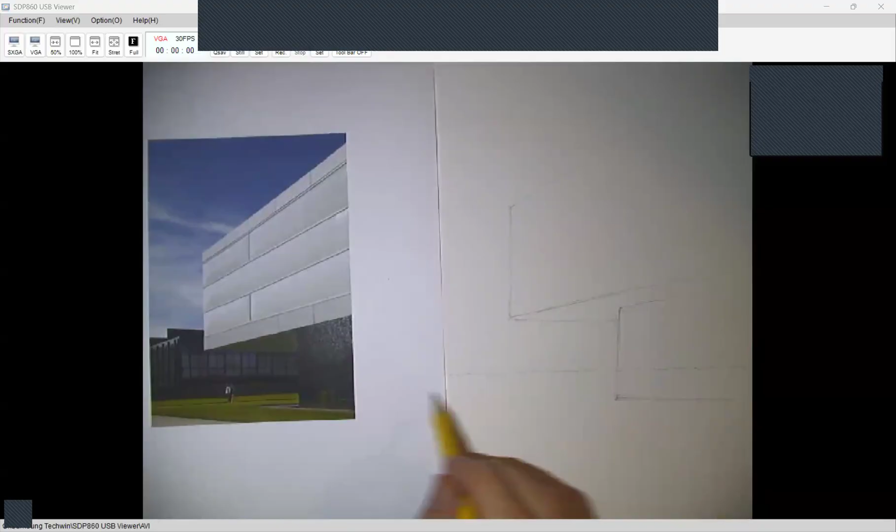Just remember that our horizon line and the vanishing points are just off. If I were actually to continue these all the way over, they would be right about in the middle of my image. So then I can come up here and just draw almost connecting the dots. I'm making this smaller so I can do this. The rest of it is really just, again, always referencing that point on the horizon line. It's more of a one point perspective. This horizontal might be vanishing down along the horizon line to a vanishing point so far off the page to the right that it's virtually flat.

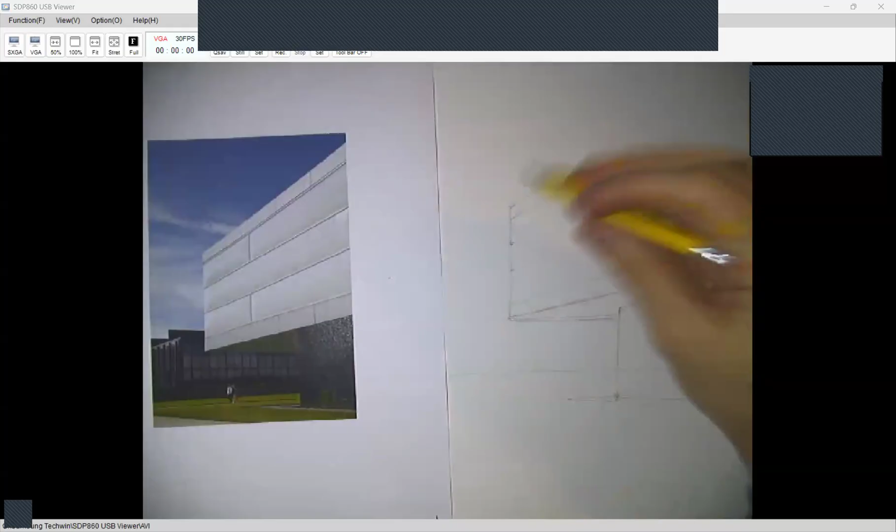And then looks like there's a little bit of a gravel base. And then this ETFE is divided into thirds. There's a metal panel base, top and bottom, with small joints for the metal panel. Window wall, which is expressed vertically.

Always remembering to keep those proportions equal. So if we have three equal parts for this, we want to make sure that when we're here at the back or on the right-hand side, we're keeping that as close as possible to a third as well.

And then if we want, there's actually some buildings by Mies van der Rohe in the background there. We could indicate those lightly as well, with much less emphasis on line weight there, but still following the same parallel faces, so they'll behave similarly.

So for our first drawing, we've got pretty much the basics. This is it.

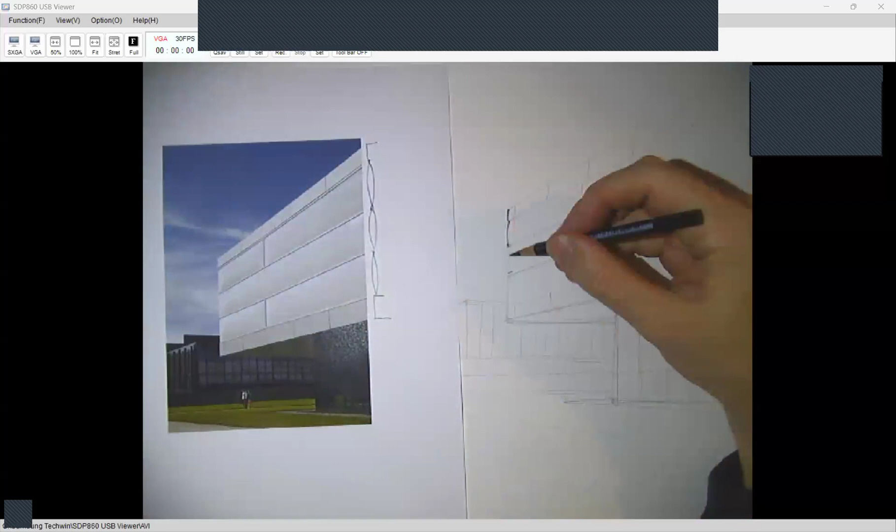And so now I'm going to jump in. I'm going to be using black colored pencil for this. This ETFE, it might be a little difficult to see, but if I were to cut a section through it, it's actually kind of like pillows. They look like this in section, and then the middle panel. So I'm going to try to emphasize that in the drawing, even though it doesn't look like it's bowing very much in the photo. I'm just going to add a little bit of that to emphasize more of that pillowed effect.

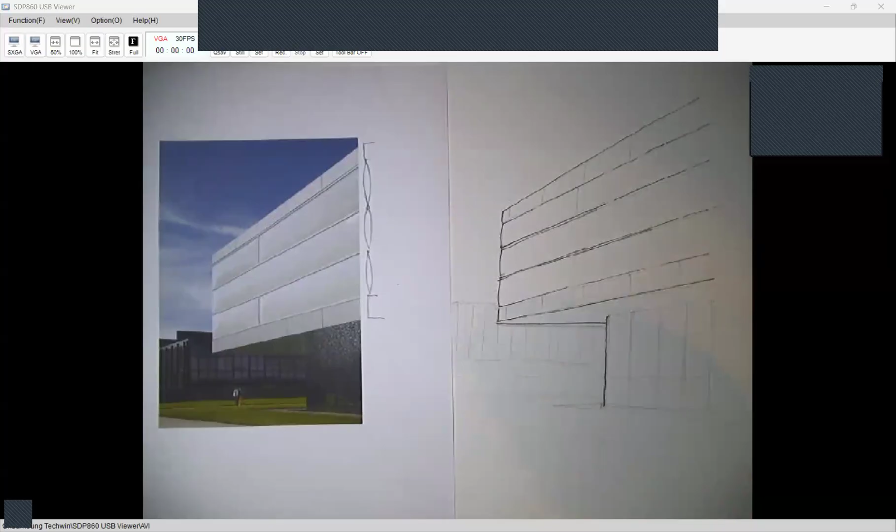Very lightly, I'm indicating these joints in the metal panel on the kind of coping condition and the base of the ETFE.

And now if I come back, I can add these joints, and from this point, I can start to just finish up the line work. And then I'm going to add some tone, and that's it for this. Very simple, very quick.

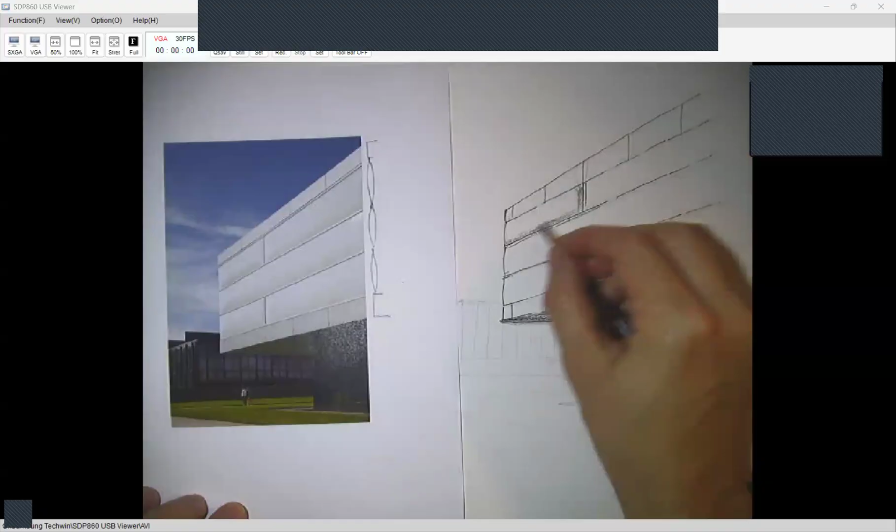So I'm going to focus on the building itself. Context, I'll do it later. I always like to make the underside of a soffit darker - I'm using the side of my black colored pencil here. That's getting very little direct light, so I always try to make that darkest. And then here, the ETFE pillow is also getting a little bit of a shadow on the underside, fading up.

Through the glass, I'm probably going to have a column here. It's hard to see in the image, but I'm just going to indicate something, a vertical element dark in the back here. And then the side, again, I could see through the glass. I'm going to add a little bit of tone there to show that there is a ceiling condition beyond.

The depth of the mullion.

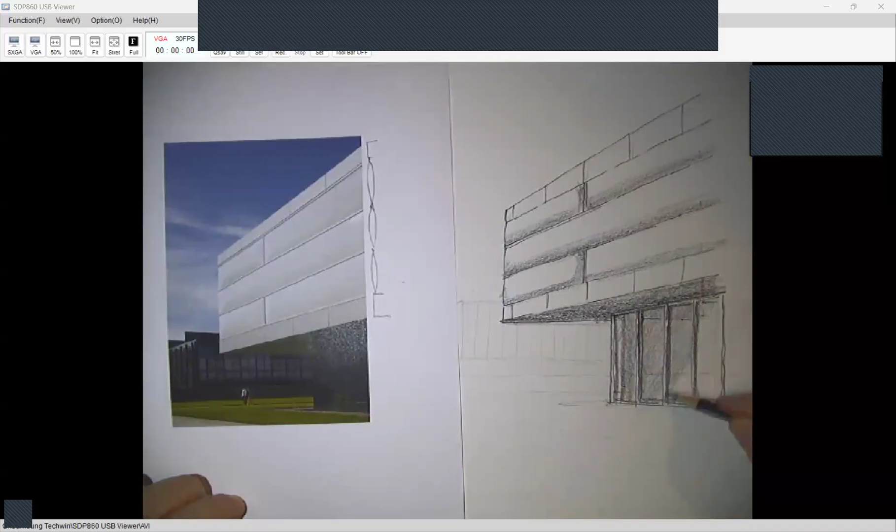And I'm just going to add some tone here to the glass itself because it has a bit of a frit or a tint to it. It's darker than the ETFE, so I'm going to show it differently than that. And some mullions in the back, just so you kind of get the idea of some transparency through that.

And in the background, just very, very lightly, that Mies building.

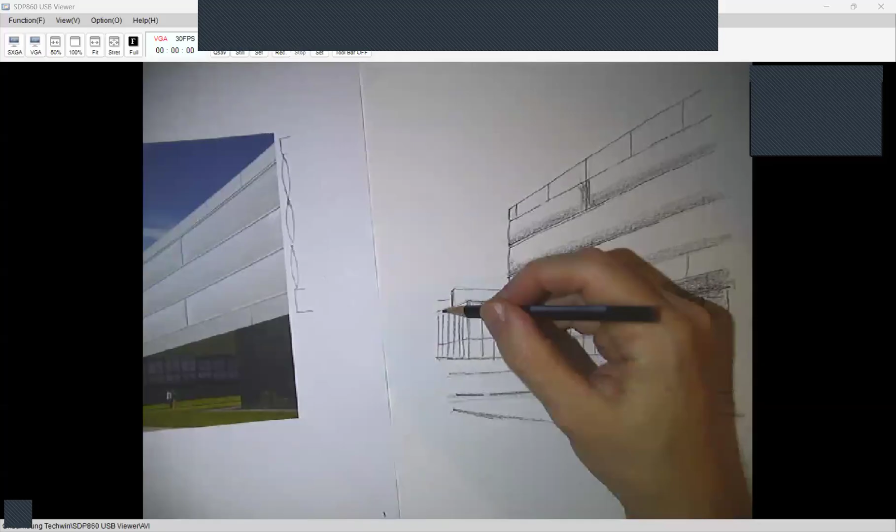A little bit of a shadow on that. And the ground plane.

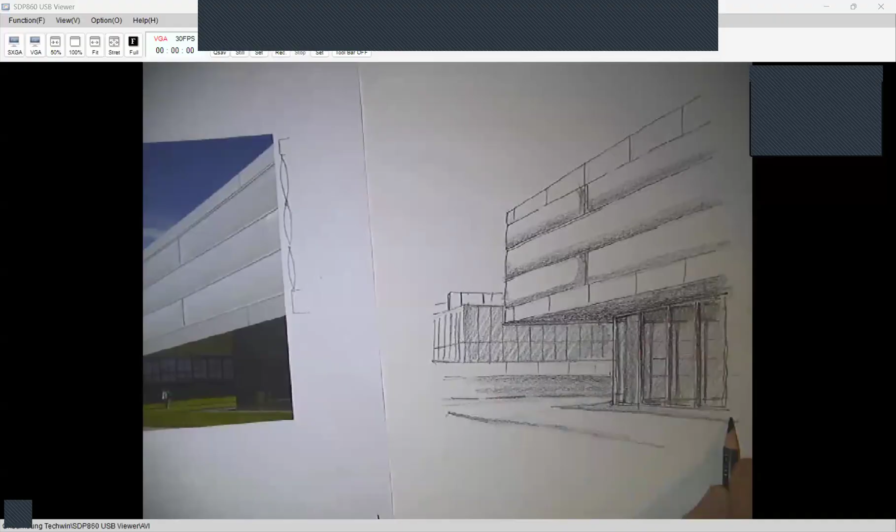And I don't have much of a sky here to mention, but I do want to just add some tone there, because when I add that little bit of sky here, I could do this in graphite as well, because I can then use my blending pencil or even my finger to kind of make that all look more uniform. By doing this, I'll make that white of the aluminum panel stand out more.

Just come back and spread that. And just coming right back just a little bit, add a little bit more edge, profile edge with my line work there.

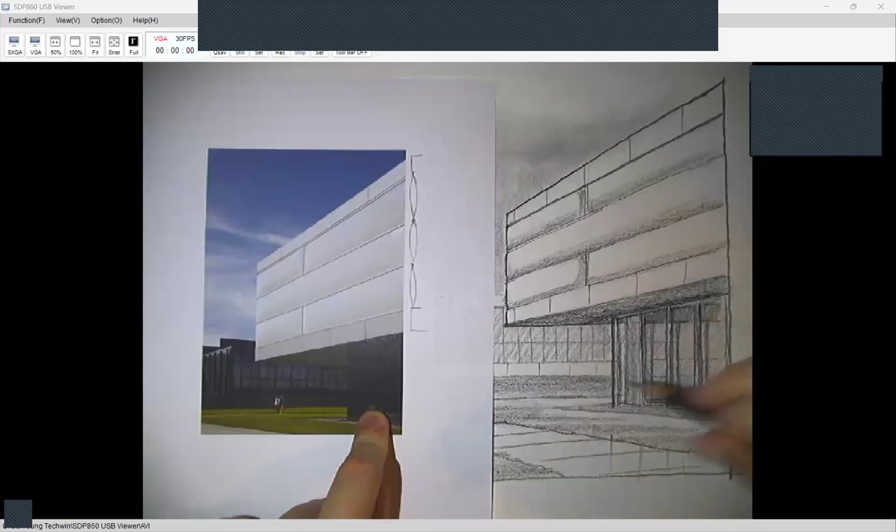So that's the first one - very, very simple, easy to start things off. And we're going to step it up a little bit. Now we're going to move on to the next project, same architect.

This time we're going to look at the Poetry Foundation. So this one, again, very, very simple, rectilinear - basically a curtain wall with a box within it and a metal screen. So it's kind of the different levels of enclosure wrapping one another, and a base, a few steps. So this kind of frame is wrapping around the entirety of this glass box.

So I'm just going to keep this right near the edge of the screen here to start off with. Again, we're at ground level.

In this case, we actually can't see the vanishing point - it's right at the edge of the image. Everything is collapsing to that point if you just continue those lines. So it's important to match right off the top and make sure that you're close.

This angle is very much just off of vertical. Almost straight, but angled just slightly up to the left. And that runs off the top of your page.

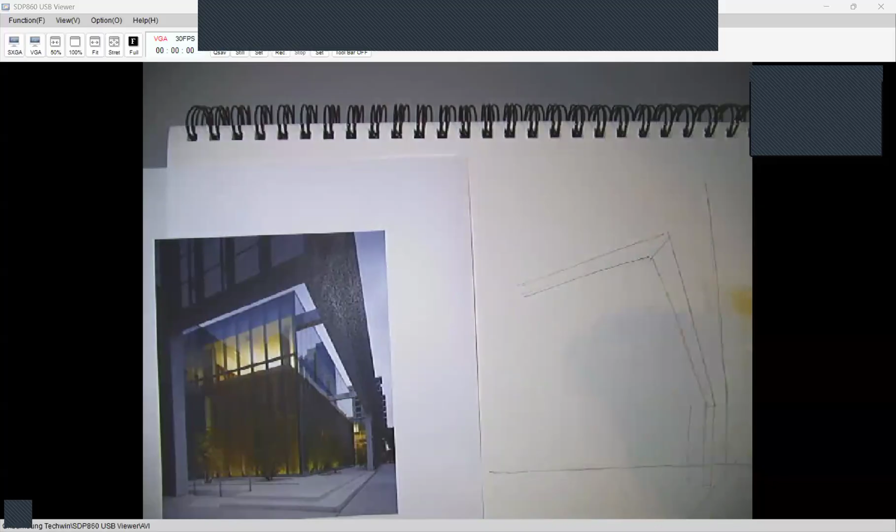So now we have the screen started here, and I'm going to come back and now add this glass box beyond. I'm not going to worry about the structure that's coming out to grab onto it just yet. That'll come later.

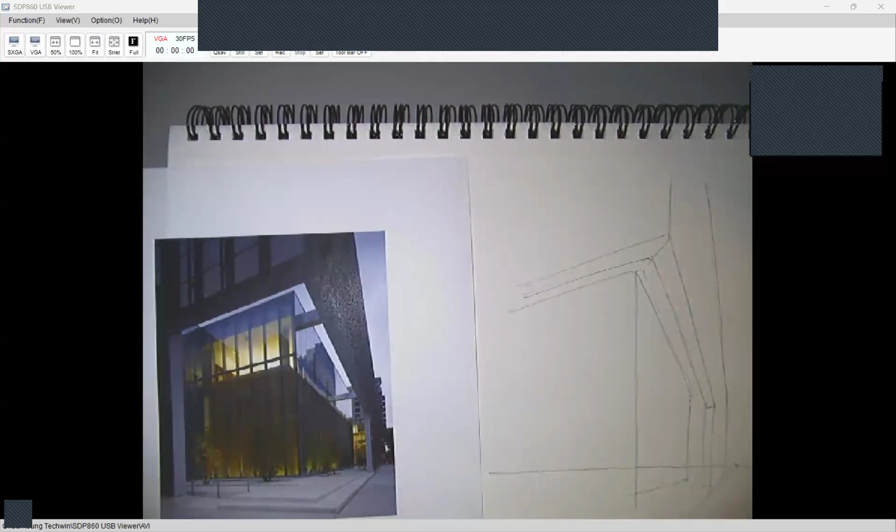Vertical, straight vertical, no vanishing there. Paying special attention to the relationships here. I came down a bit low there - I have to remember to leave enough room here, there's going to be a step.

I always want to make sure I'm checking myself against what I actually see. I've noticed now I might have to adjust something, because I can see right here that front step comes down to about here, but the relationship is more like this in the image that I have printed, which tells me I have to push this out a little bit.

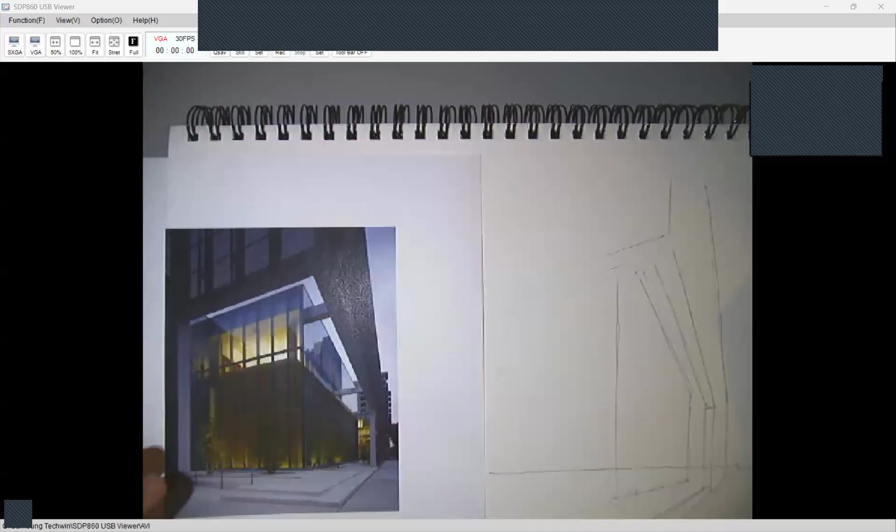I could continue the way I've been going, but if I want to be true to the image, I want to make an adjustment here and get a little bit more of this side. Which simply means this has to extend and then come down.

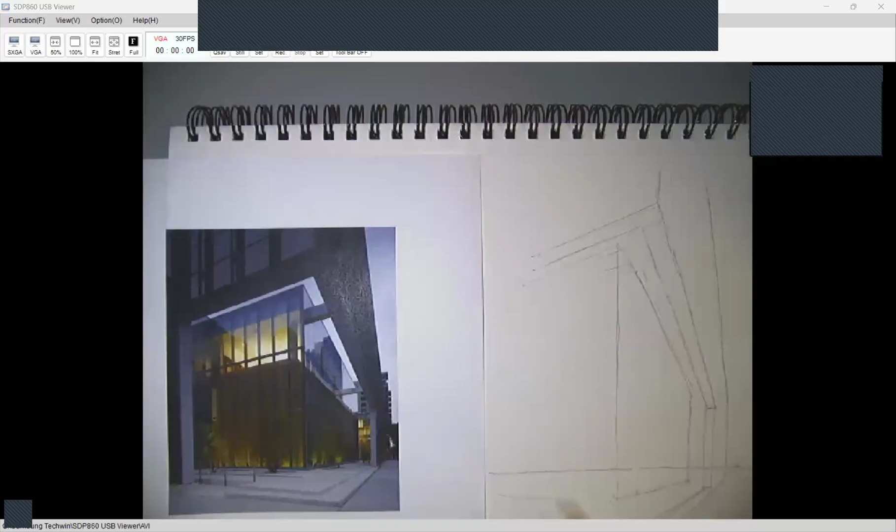A few steps. Remember to try to get those relationships somewhat accurate so that they reach down to the foreground here. There's a cutout for a small ramp in a base condition for this screen to fall in on top of.

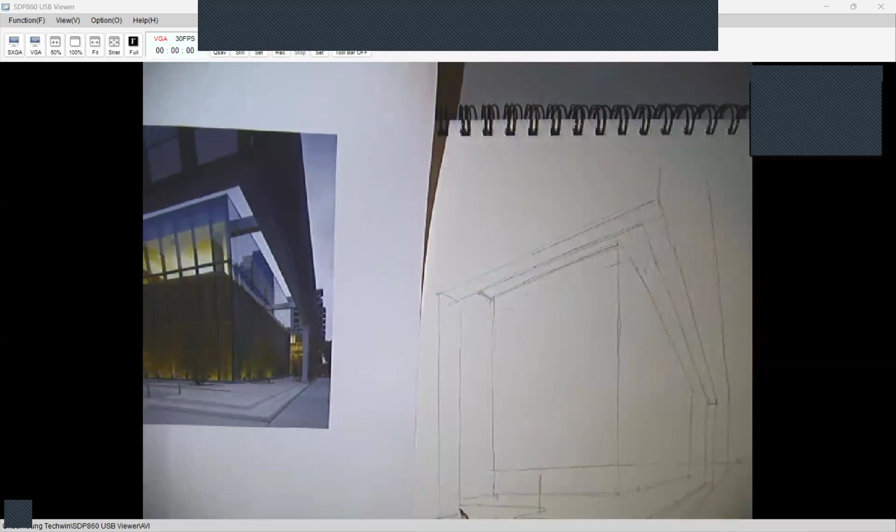Again, check those. And then I see this box comes parallel to those, very close to the underside of the screen there, and then it stops short, runs down to grade, and there's a small corner condition that I can see here, right about where this ramp comes down and this guardrail comes across. And then there's going to be some of that foreground landscaped elements here.

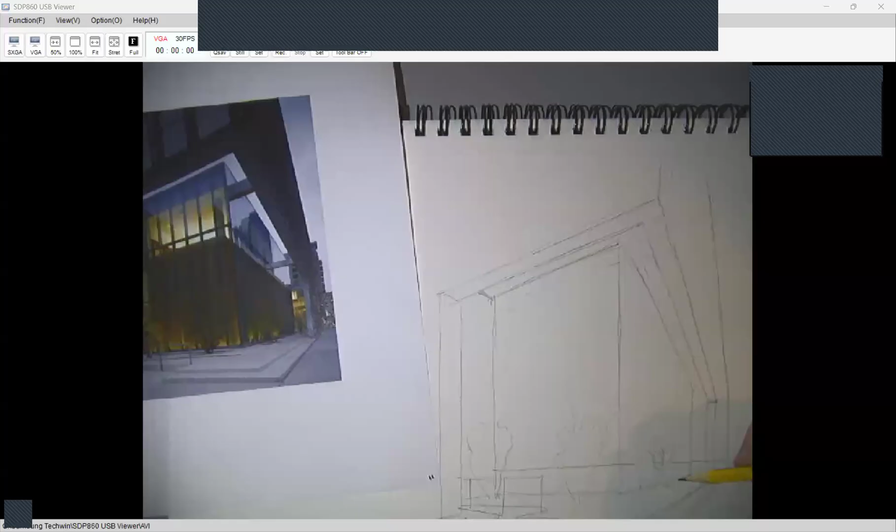The screen is somewhat transparent, so I can see that there is some backup structure here with a subgirt and framing beyond. I can see through the screen to find that.

But then the screen has quite a bit of density as you turn the corner - I'm looking at it on an oblique angle, so I don't see those through the screen very well. But it looks like the screen is pulled off of the subframing beyond, so I can indicate some of those frames coming down along the top.

And now I can finally go back and add those pieces of lateral support that come off the screen into the glass box.

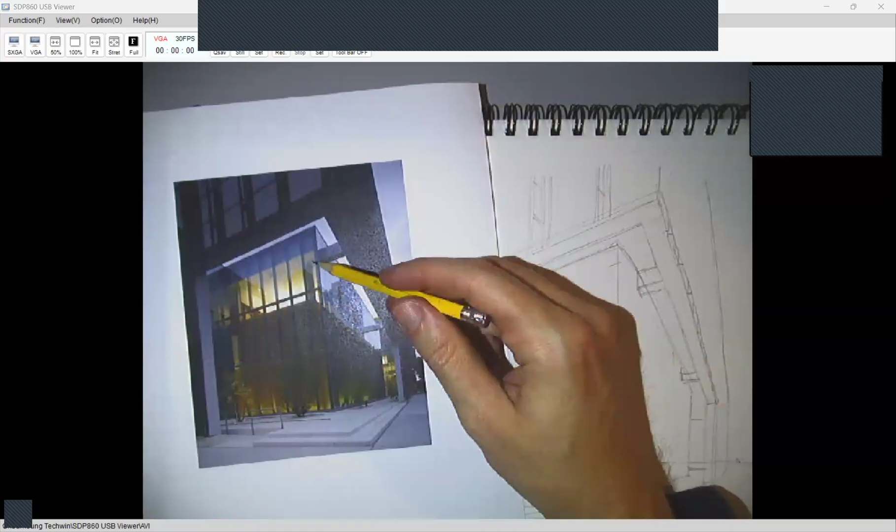And then when I come back here to this glass box, I see right away that the emphasis again is on the vertical, and it's broken up into three equal parts. So I just take that box, divide it into three, and then this line, I also divide into three.

Connecting that corner to the vanishing point. And then we have 1, 2, 3, 4, 5, 6, 7 panels - or 8 if I decide to.

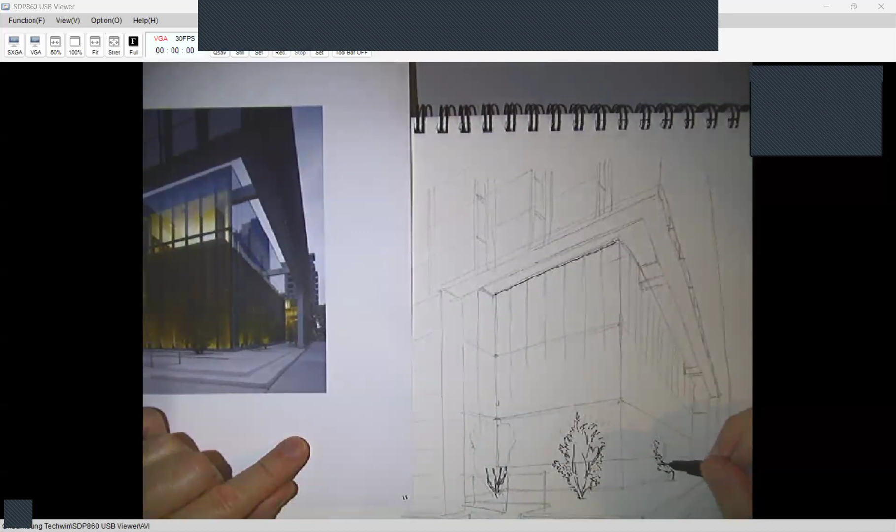Sometimes it might be more helpful to draw a simple shape, mimicking the image that I have printed here, and then just use that as a base to work around.

There's not a lot of density to the leaf or coverage in these branches, so there's going to be a lot of transparency anyway. So even if I were drawing it true to the image, as dense as it is in reality, I would still be able to see through this very much into the curtain wall beyond.

Okay, so then I'm going to start from the inside and work my way out.

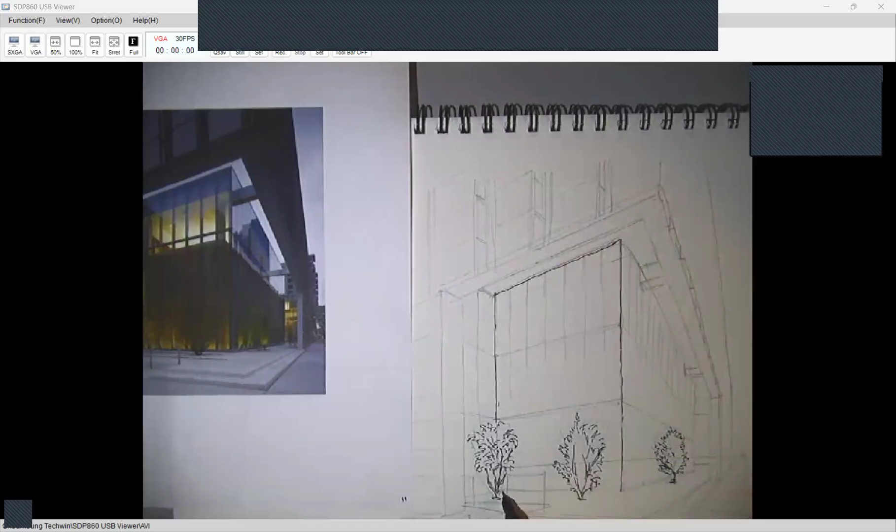I'm using ink here to indicate the exterior wall enclosure, and then I'm going to do a little bit of this interior. You can see where it's kind of this wood-clad box, which is recessed from the enclosure with an illuminated surface on the top. I'm going to do that in graphite so you get the idea that this is behind glass — it won't be represented in the same line weight or same line types as I'm doing for the exterior.

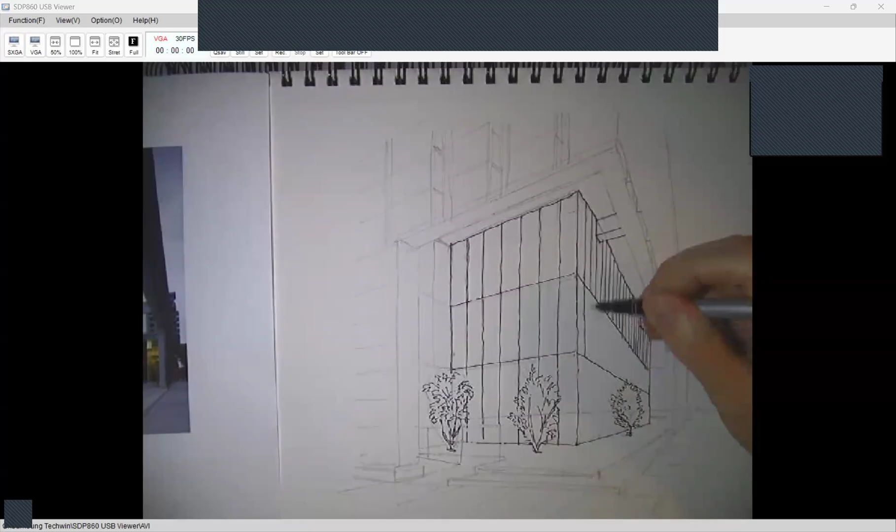Even though these are one continuous mullion that runs all the way down, I'm stopping at the horizontal because it's a long straight line. By stopping at a horizontal break, I can reset my wrist and continue down to the next mullion, which is this one — it's a kind of natural break that allows me to reset my hand.

Okay, then I'm going to come back and continue on the ground plane where I have these two small steps.

This is now the beginning of that kind of frame for the shroud or curtain that wraps the exterior at the sidewalk, just following those lines that I looked back on and decided — yes, those are accurate enough that I can go back and add my final line work to them.

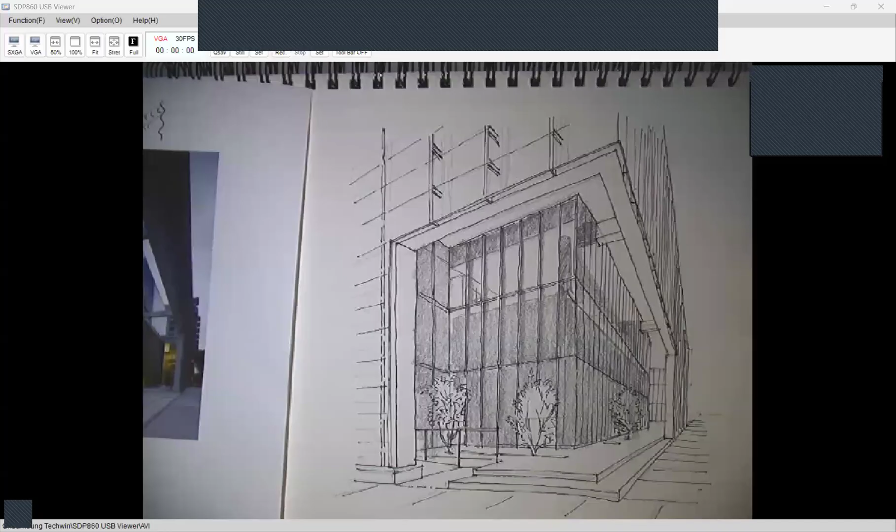This side looks to be mostly in shadow. Then I'm going to come back now with my black colored pencil to add more contrast to the foreground. So these small trees, I'm going to add some depth to that.

And the underside of these, this will receive quite a bit of dark as well. That's the underside that isn't receiving much light. And here, this will be receiving a bit more. As I get to the corner here, I'm going to increase the pressure on my colored pencil to show that. And then as I come down, I want this to lighten up just slightly as I move the pencil down the page.

And here again, the underside is dark.

And the vertical element of the stair, because in this case the top, so the underside gets quite a bit of dark, but the top is receiving a lot more direct light. So I'm going to make that light and add a little bit of shadow here to give that surface some cast shadow on it from the elements in the foreground.

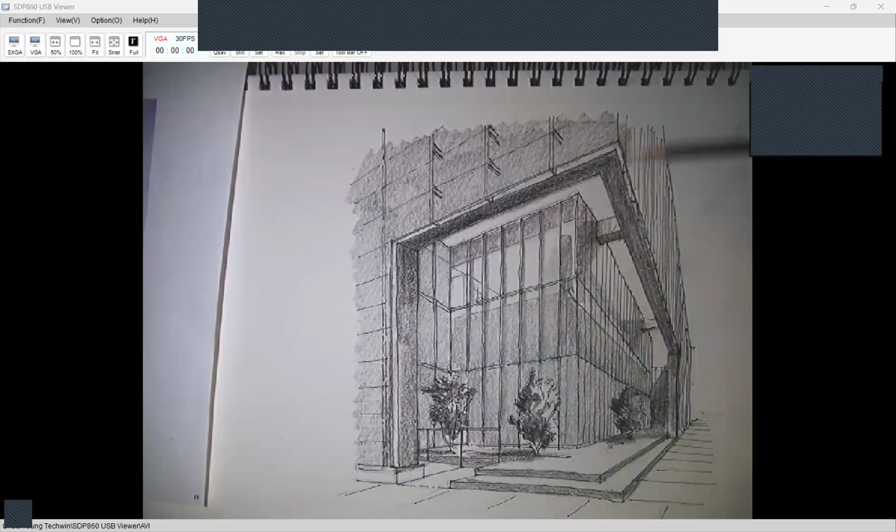And then I'm going to probably go back to graphite now and just do a wash here to indicate that there is a screen. I don't have to get too detailed on those perforations or how to represent it. It's just shown as a screen that I can see partially through, but not entirely. So this is just some of that tone to give the idea of some kind of enclosure.

Now I just want to come back a little bit more and add some line weight before I finish this one out. And I keep misplacing my kneaded eraser. I made a mess over here.

But you've seen me in the past do that little trick at the end, trying to differentiate some elements with color. In this case, it might be worth adding a little bit of color, maybe a blue here to indicate sky, but right now I'm going to add line weight here to show the edge of this. I can get pretty dark with that.

Profile edge, again, gets the heaviest line weight.

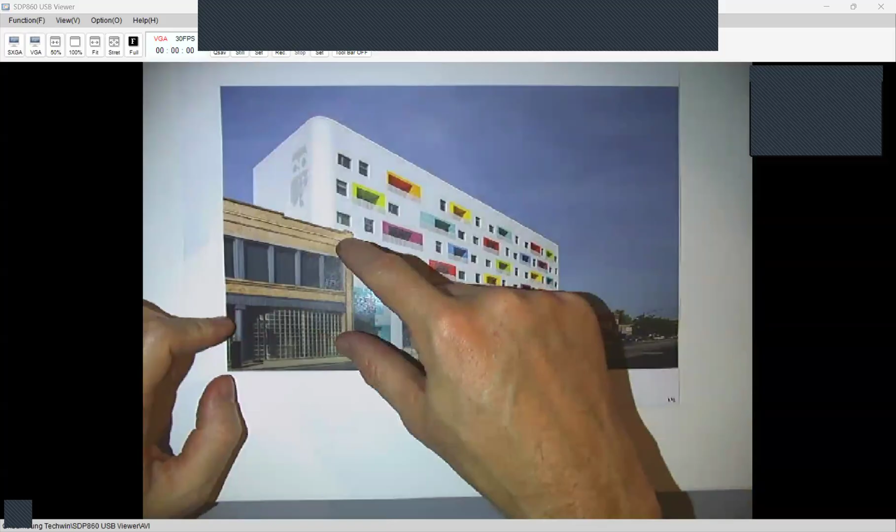These few trees, you could probably even ignore them. They're not very prominent in the image. So it's really a rectangle with a base window wall, a bit of a foreground building of an older structure, and then this large metal clad building with punched openings.

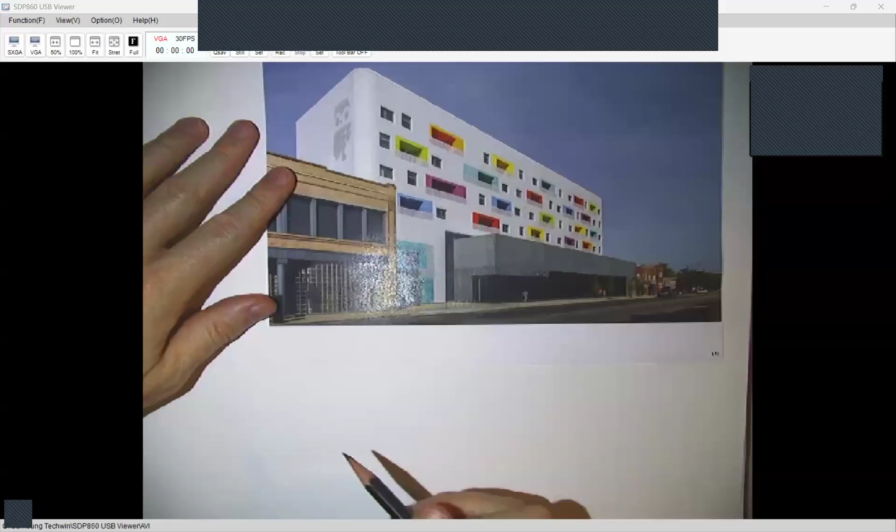So we're going to just dive right in. This one probably won't take too much time either. It's very, very simple. Start with that base as always. The foreground is very, very flattened.

In this case, if I just mimic exactly the proportions of the page, my first point is going to be off the side. In both cases here, we don't have any vanishing points on or near the page that we're drawing. So we just have to use our proportions and the relationships that we find with the angles.

But in reality, it's nothing more than two boxes stacked one on top of the other. But then there's also the foreground, older building. Just by using the same proportions, how do we break this up into more manageable parts? Like, where does that line come and hit this? How much higher do we have to go? And you can distill this.

This adjacent building has a little bit more detail going on, with a glass block and some brickwork here at the corner. I'm not going to really dwell on that, so I'm just going to break it down into where we have an upper band of windows, and then a lower band, which is kind of like this glass block and a column in the middle.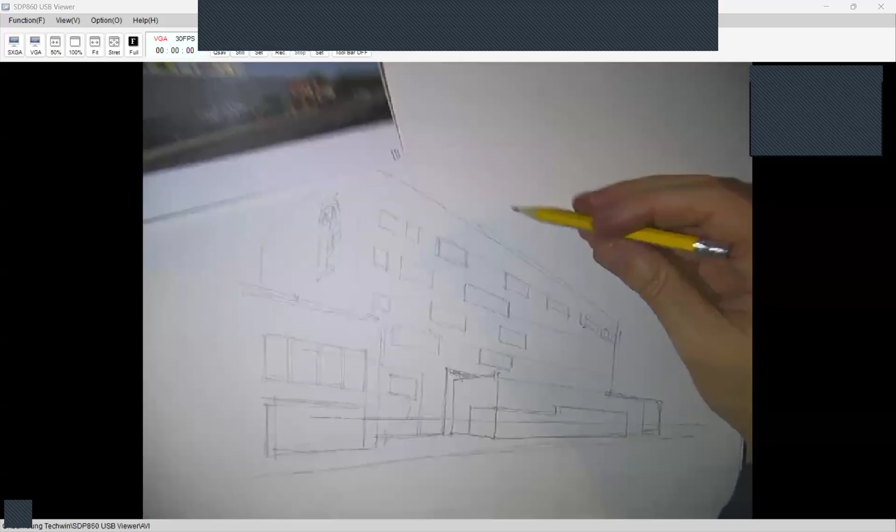That's what I'm doing here, focusing on the biggest ideas. In this case, starting with the front edge, drawing those lines to organize this, then transitioning to the bigger, colorful balcony openings. Once I've got those established, I can come back and add some of the punched openings within it, knowing I won't run out of room since the big idea is already done.

Then I'm going to come back with the punched openings, basically figuring out how many there are between each of those larger balconies. Looks like there's only one or two in some cases. I might have to make adjustments as I go, since sometimes a balcony edge could be too long or too short.

But at this stage, I'm just planning these out, and when I come back with my final line work, I can get more refinement there.

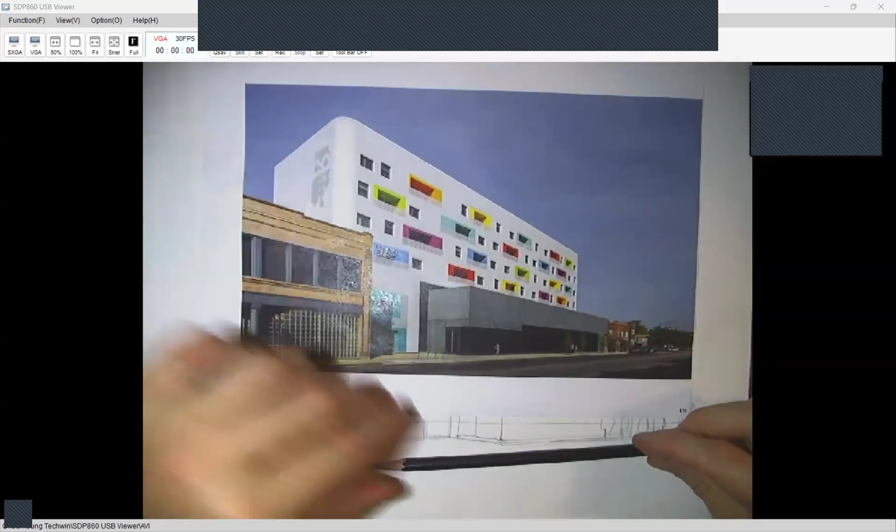Okay, so there it is. That's the basics of this one.

Now I'm going to come back in with more final line work. We're going to spend a little more time on this one because it has a few more pieces. It's a full building with more context, but the ideas of moving quickly through this still apply.

I'll probably go back to pen.

Again, foreground—you could even, if you don't want to draw all the detail here since this building isn't the focus of the drawing, just add a few elements of the form.

For now, just move on to the rest of the library. That's actually a branch library here with affordable housing above. I don't know if I mentioned that to start with, but I might have called it a library this whole time, and you're thinking, hey, that doesn't look like a library up above.

So just starting with those big picture ideas again, the two boxes that are intersecting one another.